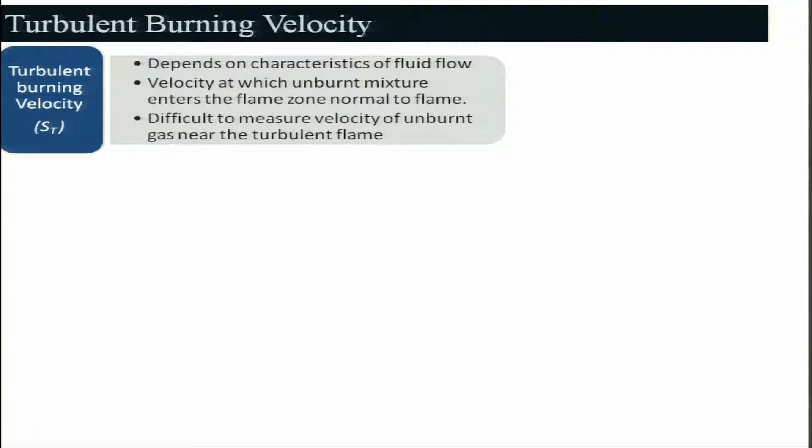Similarly, turbulent burning velocity is very important, but it is not easy to define, because it depends on the characteristics of the fluid flow and the velocity at which the unburned mixture enters the flame zone normal to the flame. Since the surface is so convoluted, it's hard to decide which surface to take, as each zone is corrugated or different. So it is very difficult to measure the velocity of unburned gas near the turbulent flame, and we end up looking at some average sense.

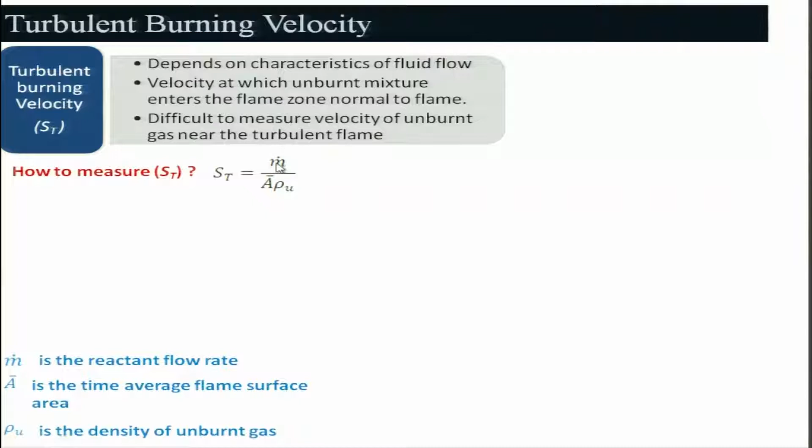That is why it is difficult to measure it the way we did for laminar burning velocity. So we write St equals m dot, which is the reactant flow rate, divided by rho u, the density of the unburned mixture, times A dash, the time average of the flame surface. The flame surface will be changing with respect to time.

If you look at the flame surface, it need not be so regular. Consider a one dimensional flame surface with respect to x. At one instant of time it looks like this, and at another instant of time, say t equal to t1 and t equal to t2, it will look different. So across these two instants, the flame surface keeps changing, as we have already seen.

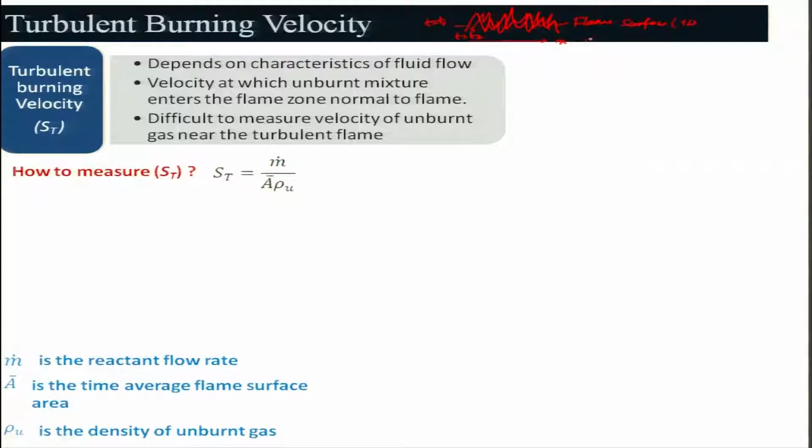So then you will have to take an average over time, and consider that A dash, which need not really be one dimensional in nature either. Therefore we define it that way, and we will try to get an expression for that.

For that, we will consider the weak turbulent flame regime, which is an extension of the laminar flame, meaning the flame will be basically similar to laminar since low turbulence is present. The flame surface will look smooth, not affected much, and the turbulence scale is of the order of the laminar flame thickness, delta L. Of course ST will be greater than SL, which is expected, and we will see how, because of the increase in thermal diffusion, which we will examine next.

We have seen basically that SL is derived from a very simple relationship. SL is proportional to root over alpha times RR, where RR is the reaction rate, which you can say is m dot triple dash F average.

Similarly, we can define ST is proportional to root over alpha T times RR. If I assume that the reaction rate is not affected by turbulence, meaning the reaction rate remains same for both laminar and turbulent, I can arrive at ST by SL equals root over alpha T divided by alpha L, where alpha L is the thermal diffusivity.

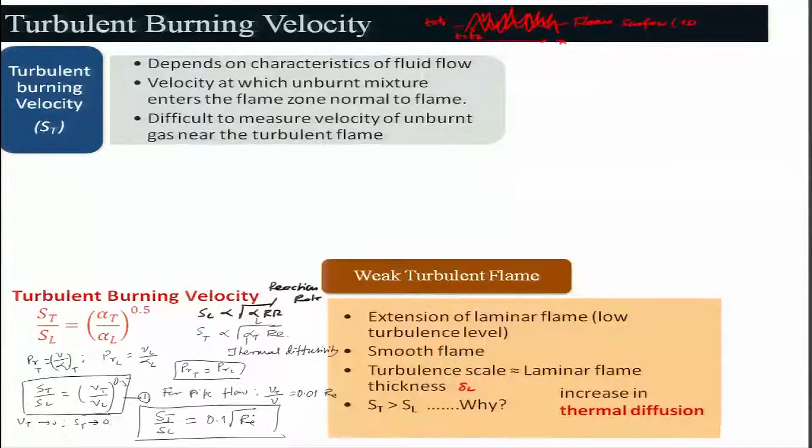Of course, when you put this Reynolds number, this will not be rho V d by nu — like if nu T is 0, then Reynolds number will be very high, it will have no meaning. So that has to be looked at, and that is the limitation of this model.

So let us look at some experimental data, ST by SL versus the Reynolds number. You can see that up to a certain Reynolds number, let us say around 2300, ST and SL is not changing, it remains almost constant, but afterwards it changes with power to the 0.5, or around that, it need not be exactly 0.5.

Once it is in this regime, we call it the weak turbulence regime. But here of course it is different — these experimental results became almost linearly increasing, this is parabolic in shape kind of thing.

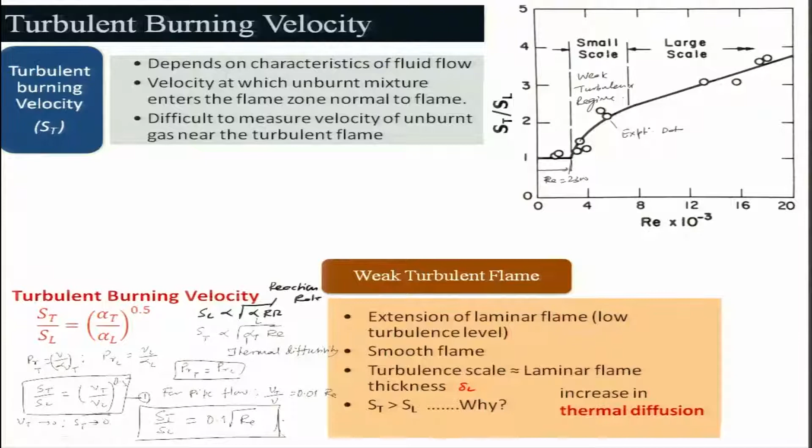So this simple relation we derived is basically matching or similar to the experimental data shown here. By this, one can really determine the laminar and turbulent burning velocity.

There is another regime where the wrinkled laminar flame will be occurring. In this case, if your fuel plus oxidizer mixture is moving at a certain velocity which has some fluctuating velocities, it may affect the flame — keep in mind that it will be distorting the flame.

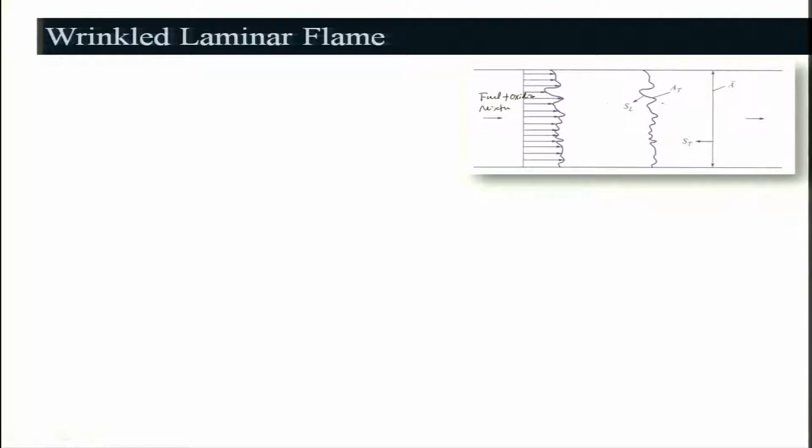It will not be affecting the inside flame thickness kind of thing. So we call it a wrinkled laminar flame. The flamelets in the flame surface propagate at some laminar burning velocity. So if you look locally, it will be moving with a laminar burning velocity, and turbulence causes only the wrinkling of the surface, making it corrugated. This occurs when the Reynolds number and Damkohler number are very large values.

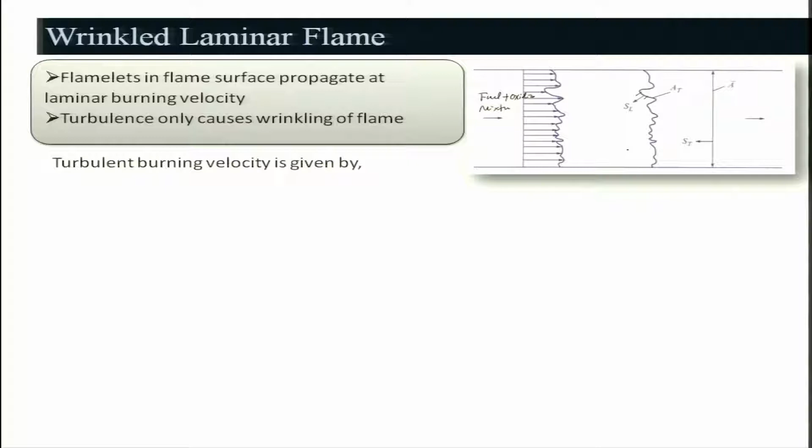That means the length scale is much larger than the laminar flame thickness. So turbulent burning velocity, if you look at it, is given by doing a mass balance, that is rho u A bar, A dash is the average velocity. If you take all those things with respect to time and average, you may get something moving with ST, right. This is just a hypothetical thing, it is moving with ST, and into rho u and A W S L, where A W is the wrinkle area, surface area, into SL which will be moving.

So then from this I can cancel it out, and this is basically ST by SL is equal to AW by A average. According to Damkohler, the constant laminar burning velocity can be written as AFL, the flamelet surface area divided by A average, if I take this as average velocity, VU by SL. VU is the velocity with which the fluid will be moving in this case.

And in a similar way, I can also find turbulent velocity related into AW, the wrinkle laminar area, divided by A average, which is nothing but because the wrinkling is occurring due to V dash RMS values, into SL. So we know that AW by A, this is AFL, the flame surface, is equal to basically A average plus AW. This is due to the wrinkling surface that will be there, and this is the average which will be taking place at any instant.

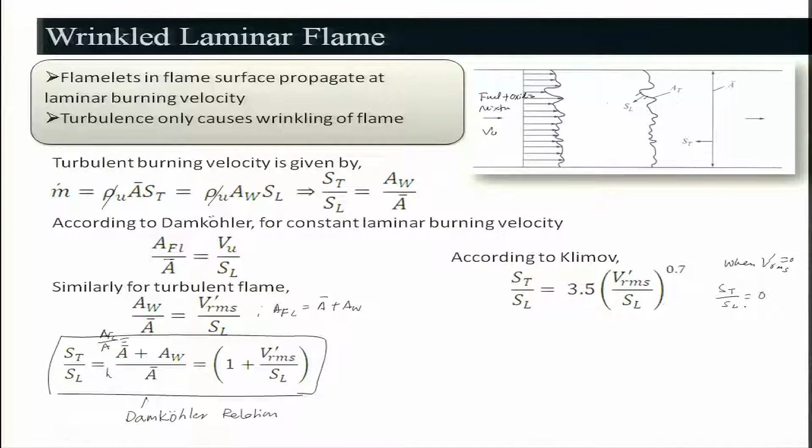So that is the limitation of this model. Then Clavin and Williams gave another model, which is ST by SL is equal to 0.5 times 1 plus the square root of 1 plus 8C V dash RMS squared, then the whole square root of the entire thing. And if you expand this by Taylor series, you get basically ST by SL is equal to 1 plus C times V RMS divided by SL, whole squared.

Keep in mind this is possible only for small values of V RMS divided by SL. This however is giving a consistent value: when V RMS is 0, ST by SL is equal to 1. That means if turbulence is not there, laminar velocity and turbulent velocity are the same. That is consistent, and keep in mind these are all phenomenological analyses.

You may find several relationships even for laminar burning velocities. You can get several relationships for the turbulent velocity and laminar velocity ratio in this regime in the literature.

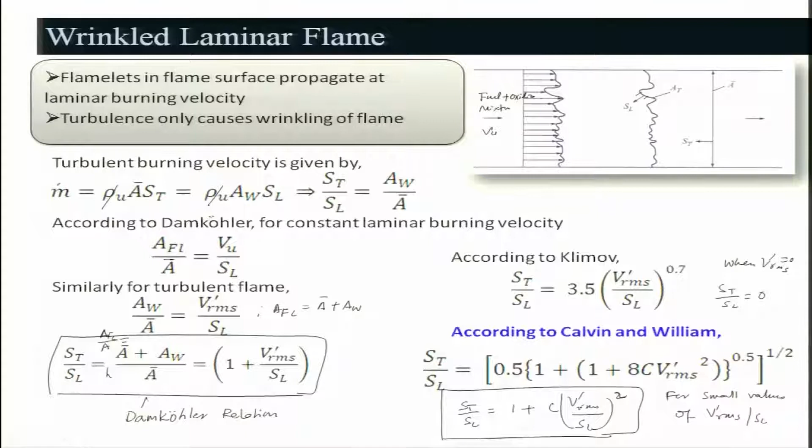However, I am discussing three of them, and if you look at the experimental data, you will find for SL equal to 40 centimeters per second, corresponding to methane-air with phi equal to 1, TU is 298 Kelvin, P is equal to 1 atmospheric pressure, that this is changing according to the Damkohler relationship, changing linearly with respect to V dash divided by SL.

These are all experimental data, and Klimov's data is matching well with the experimental data. Unfortunately, the Clavin and Williams relationship does not match with experimental data, I have not included it. It may be a little better than Damkohler, but it is still away from the data.

This is about how to handle the turbulent burning velocity for the wrinkled laminar flame regime.

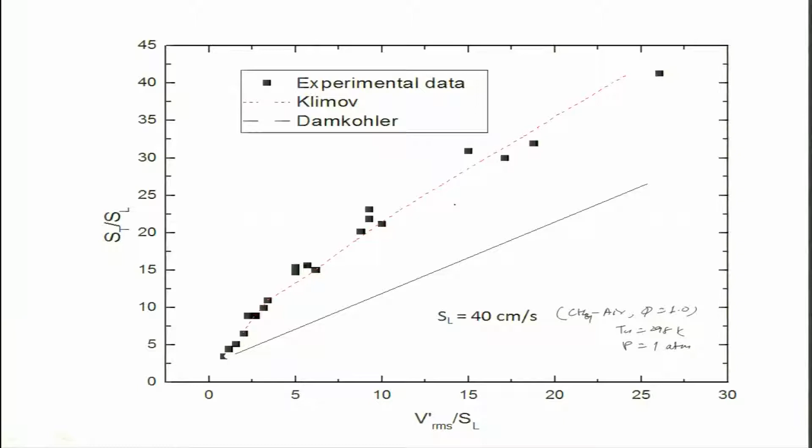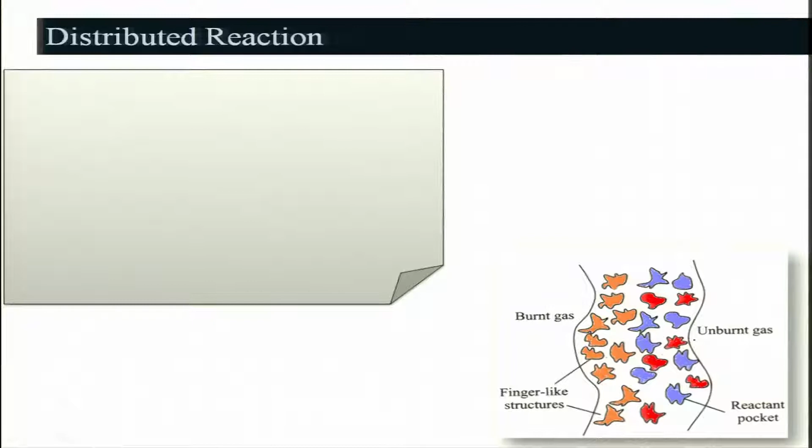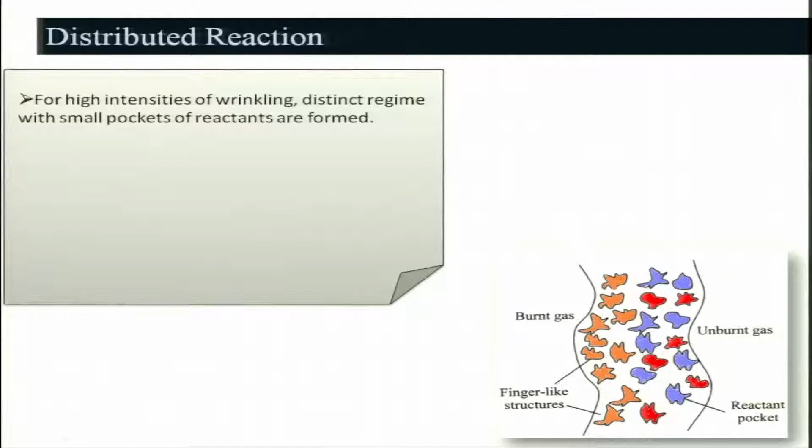Let us look at the distributed reaction zone regime, where the eddies will be coming in, as I had told you earlier. This happens where high intensities of wrinkling are present, and a distinct regime with small pockets of reactants are formed. You get some kind of finger-like structures, and the turbulence level will be very high.

As I told you, this will not be occurring in practical devices. Till now nobody has designed such a device where the turbulence level will be higher with a smaller Reynolds number, but however the eddies will be smaller in size.

This is possible, however, in laboratory scale using a stirred reactor. You can think of a reactor here with jets where the fuel can be coming. These jets bring the mixture in, and they are impinging onto a surface.

What happens is intense mixing takes place, and this is known as a stirred reactor. You can think of putting a fan and moving it at very high velocity, mixing that way. It is a very intense mixing taking place, so the scale will be very small, and this is a stirred reactor.

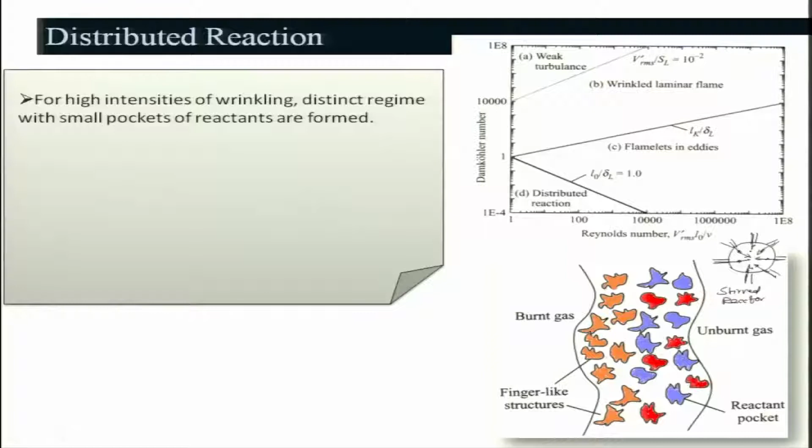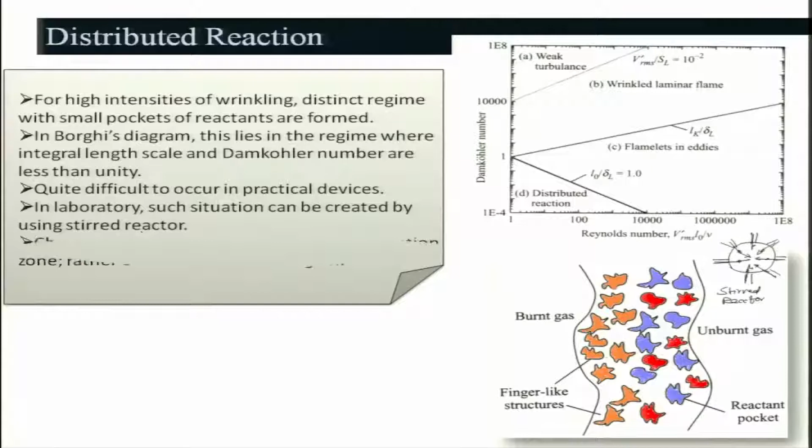This mixing takes place, but that is quite difficult, and as I have already told you, this is in the Borghi diagram where the Damkohler number is less than unity and the Reynolds number is very small, quite difficult to occur in a practical device. In the laboratory, such situations are created using a stirred reactor, as already discussed, and chemical reactions are not completed in the reaction zone, rather they occur in the post flame region, because the mixing is so high that reaction does not really take place.

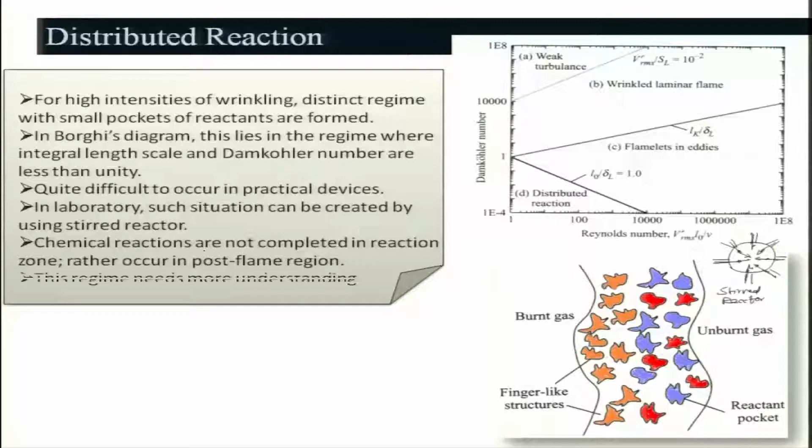This regime needs more understanding. However, people have given the relationship ST equal to 6.4 times VRMS, V average divided by VRMS to the 3/4 power. This is a semi-empirical relation being used, which of course is meant only for the turbulent velocity, and when VRMS is 0, there will not be any turbulent velocity.

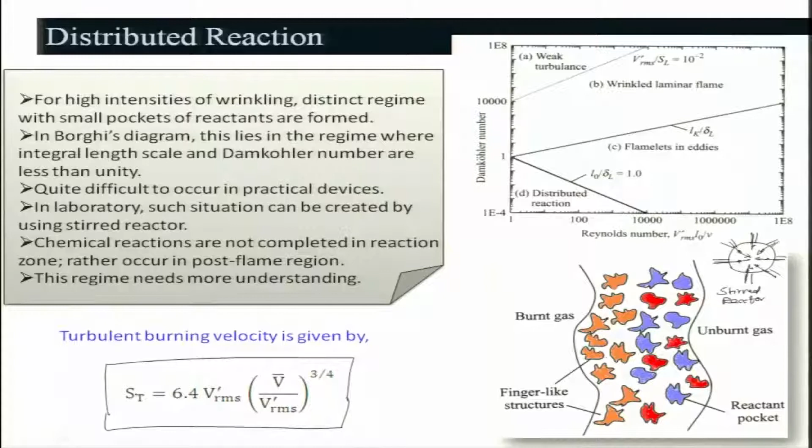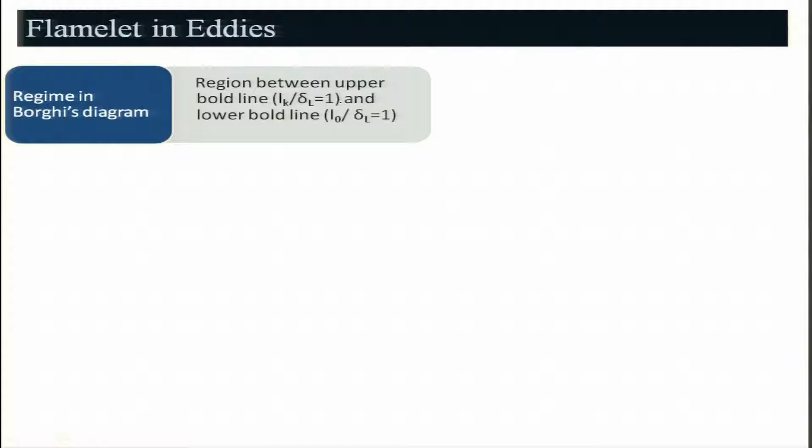Let us look at the flamelet in eddies regime. According to Borghi's diagram, the region between the upper bold line Lk by delta L equal to 1 and L naught by delta L is the flamelet eddies regime which will be taking place.

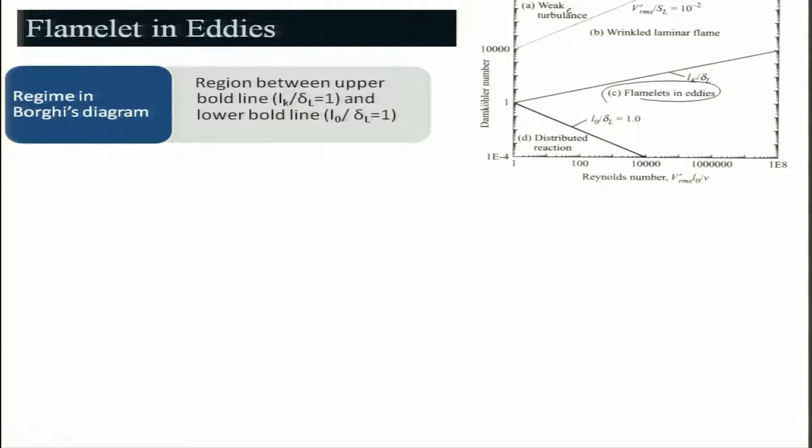Keep in mind that large parcels of unburnt gases will be entering into the reaction zone, and when entering, they undergo a change in shape and size. The parcel will break down as it tries to mix with the hot gases, its surface area will increase, and as a result the interfacial contact between burnt and unburnt gases takes place.

In some places it may extinguish, meaning there will be a flame where burning is taking place here, and this region is unburnt. If it is unburnt, then there will be some extinction region there.

As a result, the combustion is determined by the rate at which parcels of unburned gases are broken into smaller ones, caused by the eddies. That means the burning rate is governed by the turbulent mixing rate rather than the chemical reaction rate. Keep this in mind: you get parcels of unburned gases and fully burned gases.

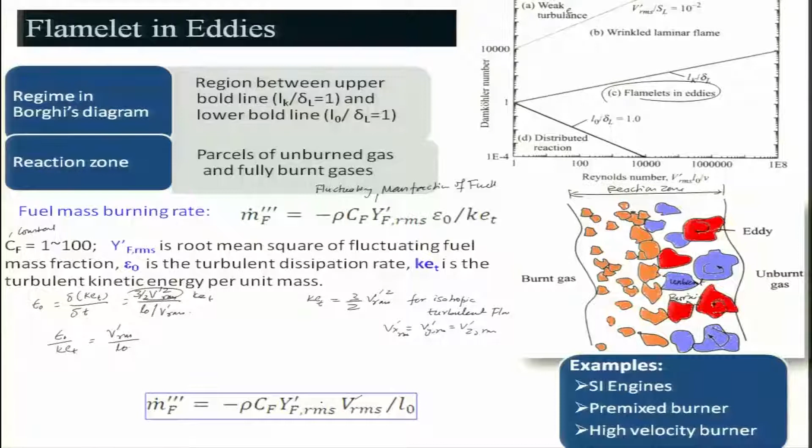So with this I will stop. This kind of flamelet in eddies concept occurs in spark ignition engines, premixed burners, and also high velocity burners.

In the next lecture we will be discussing basically diffusion flame. Thank you very much.